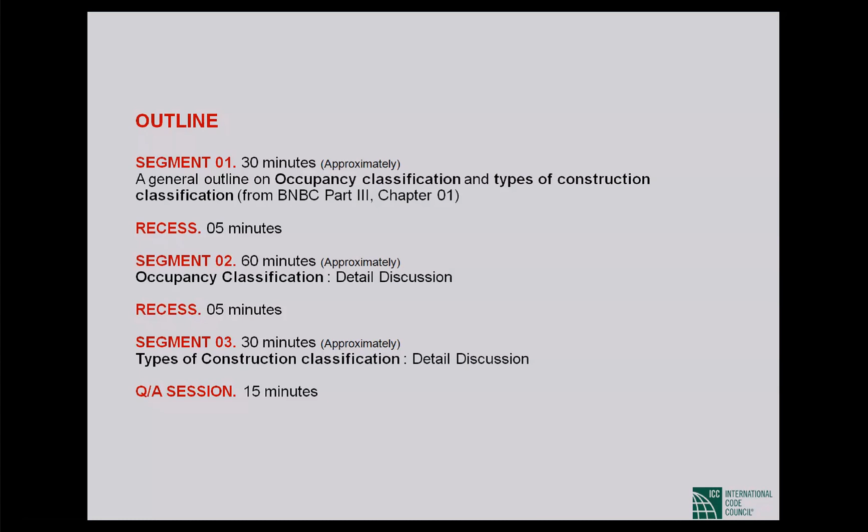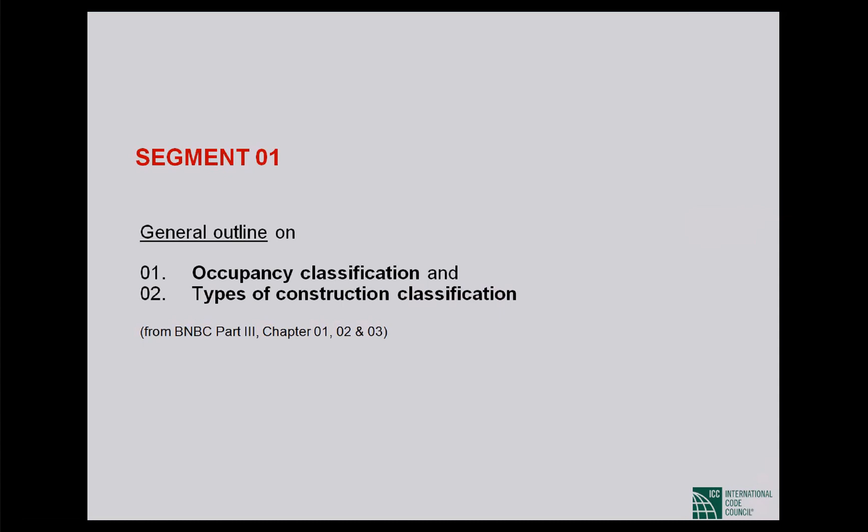So what we will cover here in this presentation today is part of chapters 1, 2, and 3 of BNBC 2020 part 3. Actually, it's part 3's 3 chapters partially covered. So let us get to the topic. We are starting segment 1 here, which is a general outline on number 1, occupancy classification, and number 2, types of construction classification.

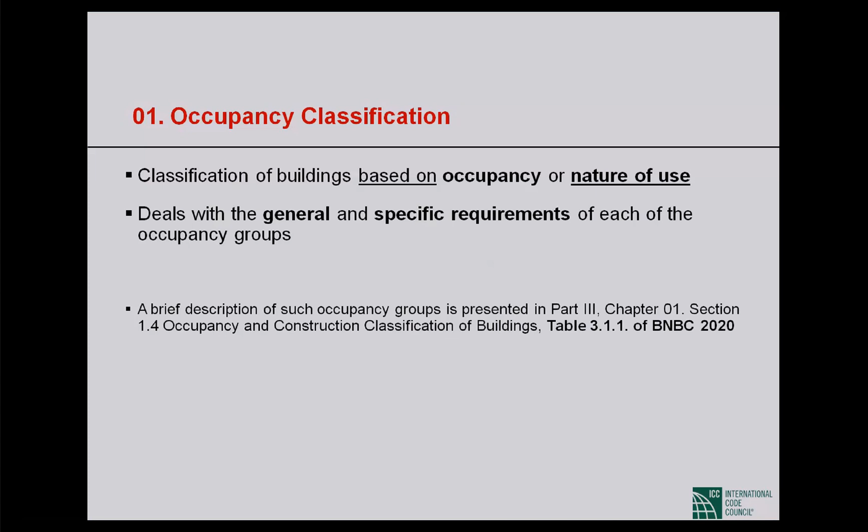So let us get an idea about occupancy classification. Occupancy classification of buildings is based on occupancy, or nature of use—how the occupants use the building is the basis of this categorization. It deals with the general and specific requirements of each of the occupancy groups, with more detailed information. It has a few chapters on it, but the initial brief description of the occupancy groups is found in BNBC Part 3, Chapter 1. Especially, it starts with section 1.4, where occupancy and construction classification of buildings is a separate section, and there is a table 3.1.1 which describes it clearly.

So, what is types of construction classification? Actually, the fire resistance ratings of various types of construction for structural and non-structural members are the basis for types of construction classification. So there are 2 classifications: one is occupancy based, and one is types of construction based. Types of construction is determined by the fire resistance rating of the structural and non-structural members.

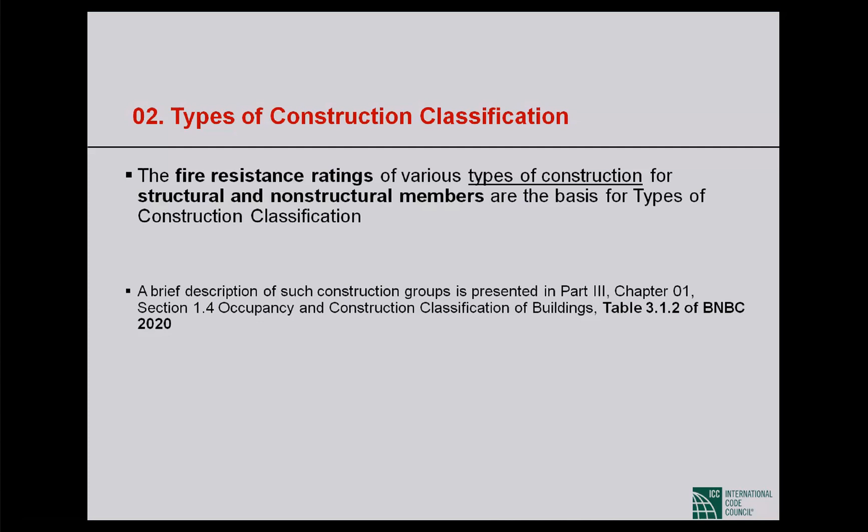The detail of fire resistance and the detail of construction classification will be found in the same chapter, same section. However, there is a different table for that, table 3.1.2.

We'll go through these tables to get an idea about occupancies and construction classifications. We start with table 3.1.1, the summary of occupancy classification. This table is divided into 4 columns: occupancy type, subdivision, nature of use of occupancy, and finally fire index with an asterisk. We'll discuss the asterisk later at the end of this chart.

In the occupancy type, each occupancy has been assigned an alphabet. The residential occupancy is assigned A, educational facilities B, and so on, continuing up to M. There are different letters for different occupancy types, and subdivisions where the letter with a number is used to represent each subtype.

In the residential category, A1 is for single family dwelling, A2 is for two family dwelling, A3 is for flats or apartments, A4 for mess, boarding house, dormitories and hostels, A5 is for hotels and lodging houses.

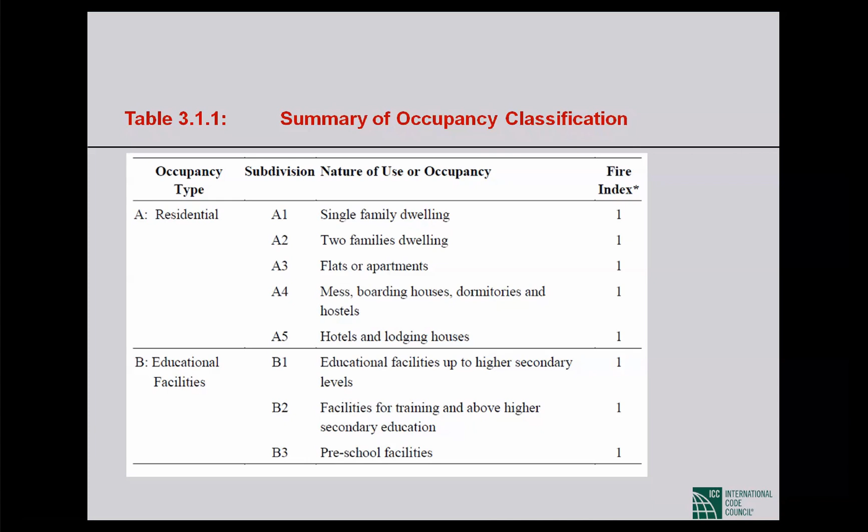The table continues. C is basically institution for care, with 5 subcategories. C1 is institution for care of children, C2 is custodial institution for physically capable adults, C3 is custodial institution for incapable adults, C4 is penal and mental institution for children, and C5 is penal and mental institution for adults. They all have a fire index of 1.

But D, E, and F have a different fire index, which is 2. D is for healthcare facilities, with two types: D1, normal medical facilities, and D2, emergency medical facilities.

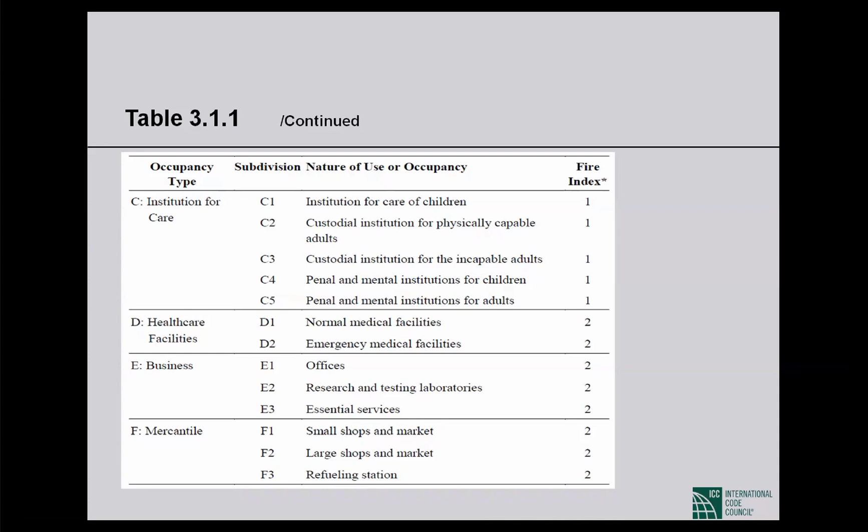E is for business. E1 is office, E2 is research and testing laboratories, E3 is essential services. F is for mercantile: F1 is small shops and markets, F2 is large shops and markets, and F3 is refueling station.

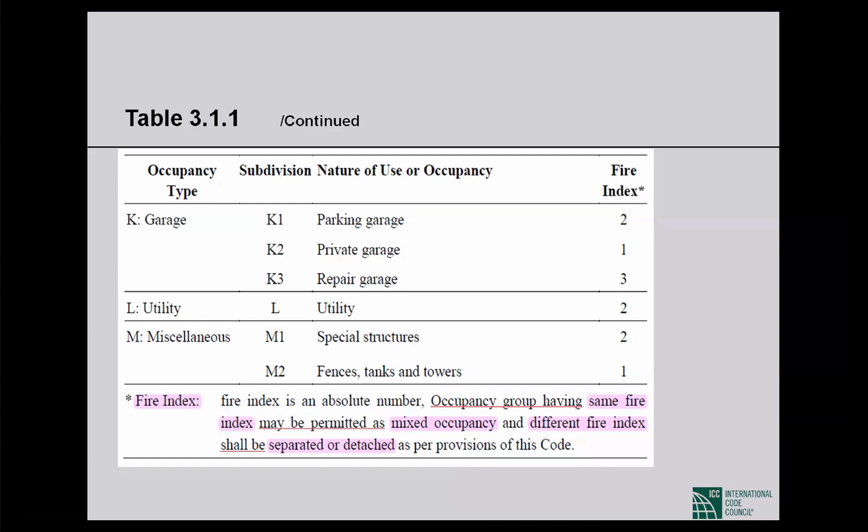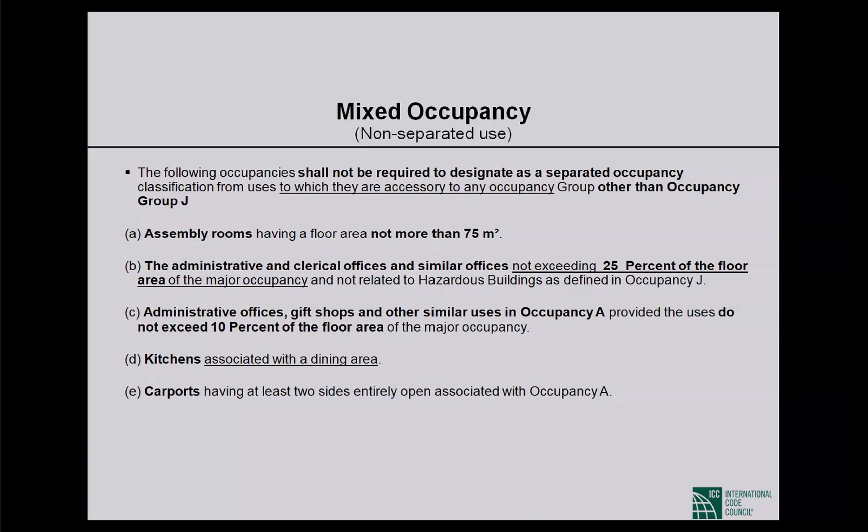So these are mixed occupancies, non-separated use, of course. So they can be considered as part of the main occupancy, and we don't need to take any special measure to accommodate them.

So here comes the separated occupancy. As you can see, separated occupancy also involves some construction measures. It's not only separated, the construction is also very important here. So, separated occupancies and construction: it says that when 2 or more occupancies are accommodated in a building, each such occupancy shall be separated according to the provisions specified in section 2.3, chapter 2, part 3, and table 3.2.1. We'll go into details of these tables and chapters and sections later on.

So we can have an idea from this statement that there are options for mixing 2 or more occupancies in the same building, but it has a condition that there will be some separation requirements, and that is mentioned in a particular section and table of this part of BNBC.

When 2 or more types of construction are used within a building, the entire building shall be subject to the most restrictive construction type and shall comply with FAR restrictions as per provision of this code. So this is about construction, not about occupancies. The second para is about type of constructions. So if we mix two or multiple types of constructions together, the most restrictive construction type shall dictate and dominate, and we have to comply with that, and the fire rating corresponding to that type of construction will be allotted to that particular development.

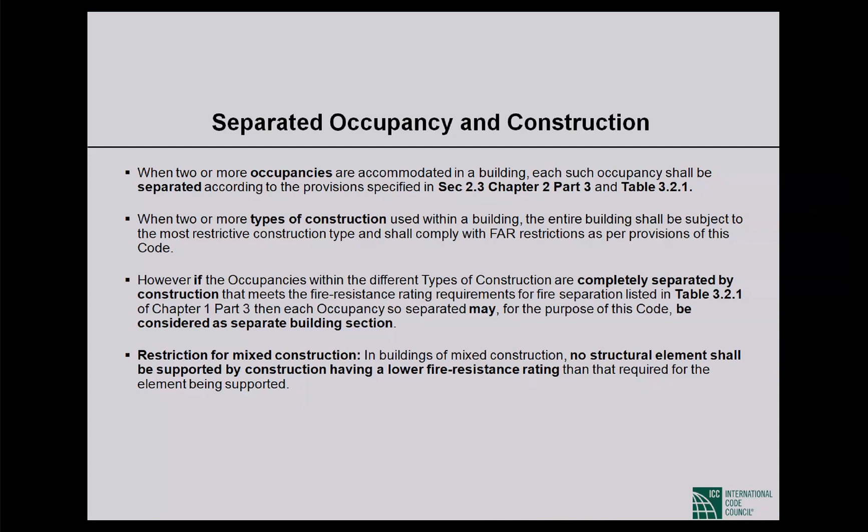Let's look at table 3.2.1, which is referred in the above slide. What is it about? It is about barrier walls and floor and ceiling assemblies and their fire resistance rating requirement, because they separate two occupancies or two types of construction from each other. So they are known as barrier walls or barrier floor and ceiling assemblies, and the fire resistance rating requirement will be according to this chart.

This chart has rows on the top side and a column on the left side, having the same occupancy numbers, A1, A2, A3 up to M1 and M2, and also A1, A2, A3 up to M1 and M2 on the other axis. In between them, there are three options: one is a number, another is NA or not applicable, and the other is NP or not permitted.

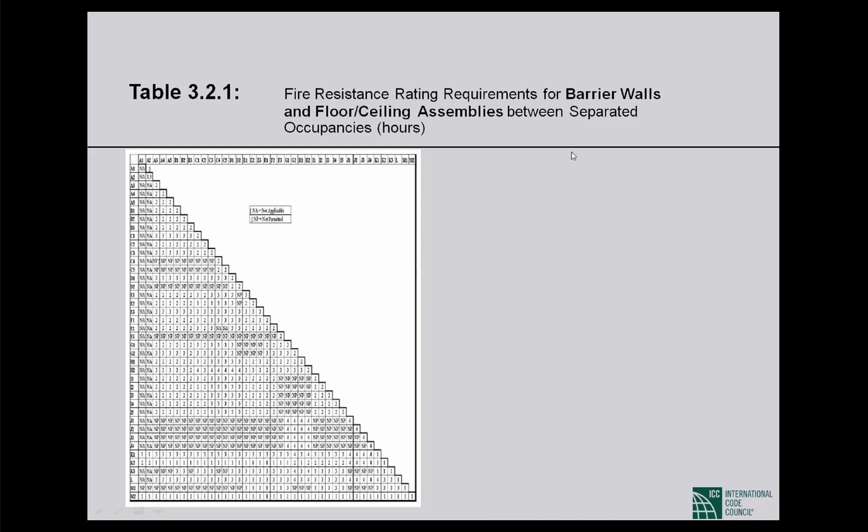So when you get an NP in a situation corresponding to other occupancies in the chart, you can understand that this particular type of construction is not permitted. But when you get a number somewhere, say 3, for example for E3 and B2, it is permitted, but you will have a 3-hour separation for barrier walls and floor and ceiling assemblies. So this is the chart that allows us to make mixed occupancies with separation. This is a separated occupancies chart.

Here is detached occupancy, the last type of occupancy mixture, where a building separated by distance in the same plot to accommodate different types of occupancies shall be termed as detached occupancy. So here we are separating by distance, not by material or fire resistance requirement of construction materials. We are just separating different building blocks through distance, and that will ensure fire safety. But it can be done within the same plot, as happens in many complexes or campuses.

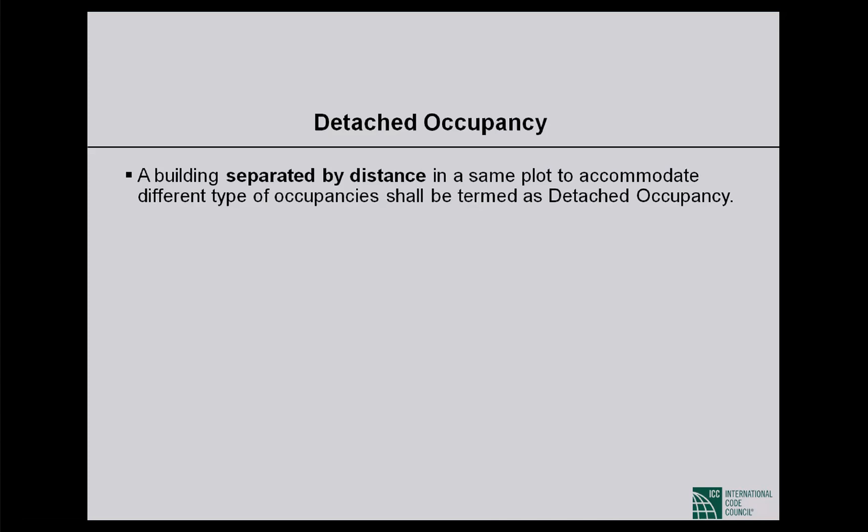So how will it be done? Actually, the separation distance is determined on the basis of two criteria: one is on the basis of difference of occupancies, and the other is on the basis of difference in height. For tall buildings, we have separate separation rules or setback rules. But for occupancies, we also have separate setback and separation rules.

So if two buildings side by side within the same plot are of different occupancies, we can make two buildings, imagine an imaginary line in between, and from that we can determine the fire separation distance. For occupancy 1, it is D1, and for occupancy 2 it is a different fire separation distance, D2. So the overall separation distance between these two occupancies is D1 plus D2, a combined distance. This is how the separation distance will be measured for detached occupancies.

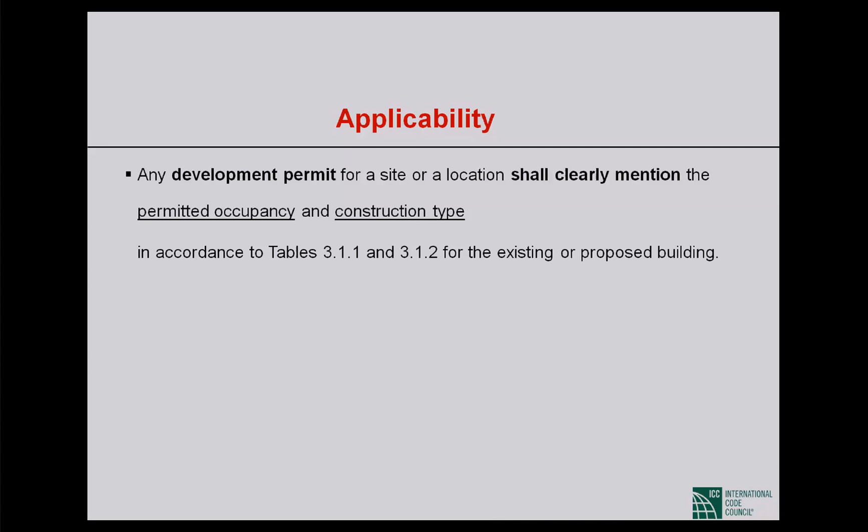So what happens to any building which is already in use, and sometimes it happens that we want to change the use. So the rule says that we need permission to do that, because without prior permission from the authorities, no change shall be made in the type of occupancy or use of any building that would place it in a different occupancy group, or in a different subdivision in the same occupancy group.

So say for example, we have a house for residential category, say A1 category, and we have decided to rent it out for some commercial purpose. We can't do that. So we cannot change type of occupancy. At the same time, even we cannot convert it into a hostel or dormitory because it will send it into a different subdivision of the same occupancy group. That is also not allowed without the prior permission of the authority.

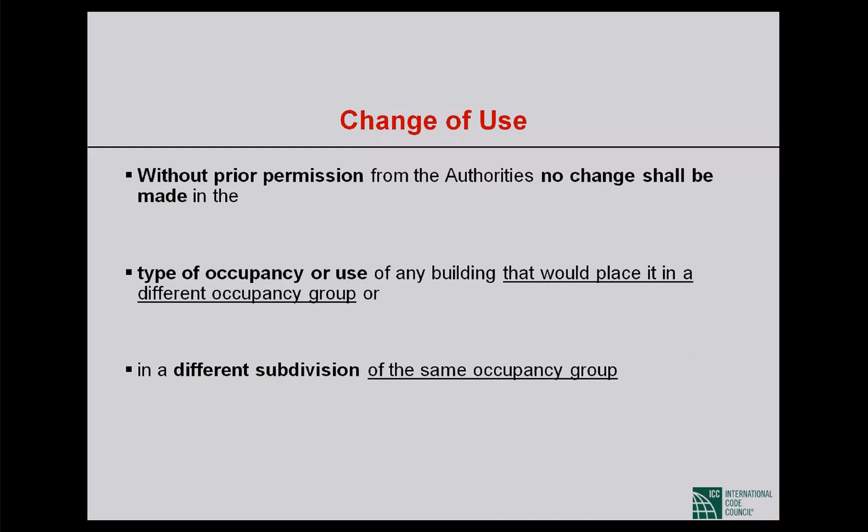We are almost at the end of this session. Just a quick go through of certain terminologies, because these terminologies will be coming again and again in our presentation, and we need to have a clear idea about these terminologies to understand this occupancy-based classification and the construction-based classification.

So there will be one is barrier. A barrier is a wall or a partition or a floor slab or a ceiling within a building which confines and protects flow of smoke and fire from the exposed side of the barrier. The fire rating of barriers shall be complied with the provisions of this code.

Then comes the control area. This is also related to the barrier. Control area is a space or a room within a building enclosed by barriers with fire rated walls, floor and ceiling, where the quantity of hazardous material shall not exceed the maximum allowable quantity per control area for storing, displaying, handling, dispensing, and using as per provisions of this code.

Then comes fire separation distance, a minimum distance which is to be maintained between potential sources and/or between structures for fire safety. In case of difference between building setback and the required minimum fire separation distance measurement, the higher value shall be implied. So I was wrong in mentioning that the fire separation distance will be determinant. Actually, it says that the higher value shall be implied, either setback or the fire separation distance, whichever is higher. So there is a correction here.

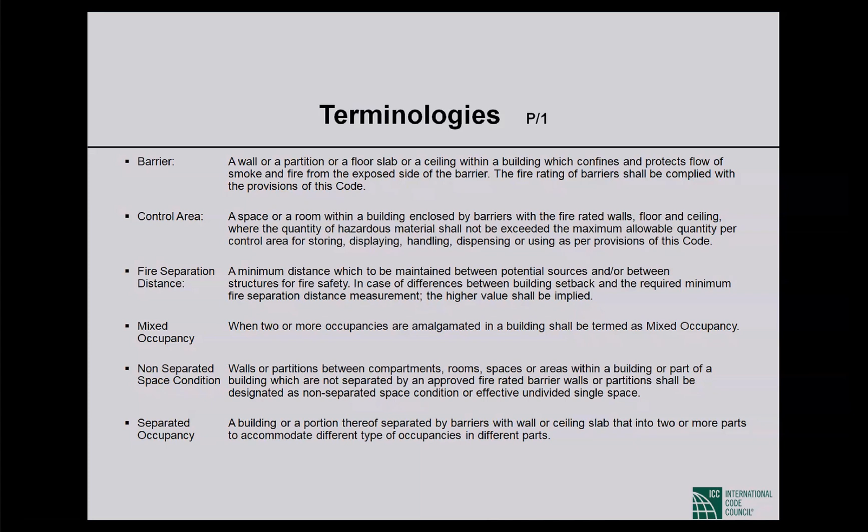Separated occupancy. A building or a portion thereof separated by barriers with wall or ceiling slab that divides it into two or more parts to accommodate different types of occupancies in different parts. Separated space condition. Rooms, spaces or areas within a building when separated by approved barrier walls.

Separation wall. This is a peripheral wall of a building, or a building which shall be divided into two or more, or a common wall between two buildings to control spreading of fire as per provision of this code. Structural frame. All members or elements such as columns, girders, beams, trusses, spandrels, which form a frame and have direct connections with bearing and transferring as an integral and essential element for the stability of a building or structure as a whole.

Unprotected. The element that shall have no prerequisites of fire protection rating. Combustible material. Any material which burns and enhances the magnitude of fire. Party wall. A fire-resistant rated wall where openings are protected, which is constructed from the ground level and continued up to at least 1 meter above the roof of a building to restrict the spread of fire.

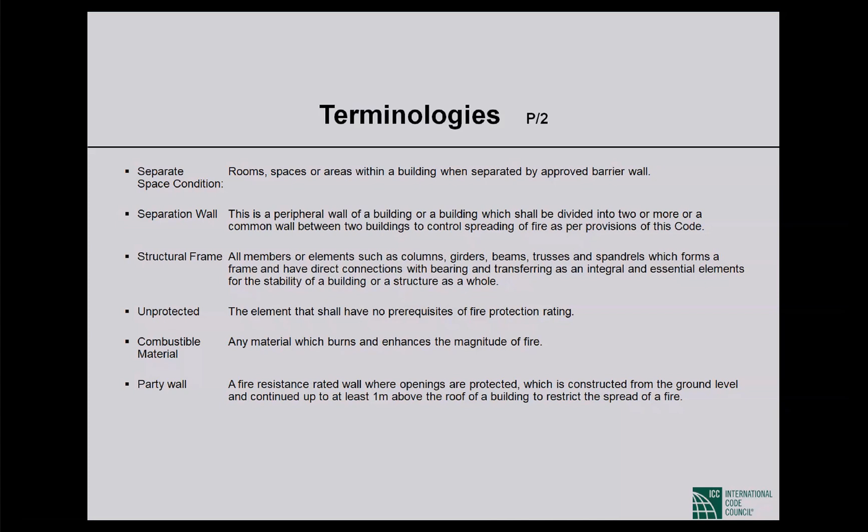So these are the relevant terminologies, and as you can see that the whole thing is focused on resisting the risk of fire and ensuring the safety of life and property. So maybe there are some repetitions, but these are the important terminologies that we need to know.

So tables and figures which are relevant to this particular presentation today. We already have covered at least 3 tables. The first 3: one is about occupancy classification, the other one is about classification of buildings and types of construction. The third one is about the fire resistance rating requirement for barrier walls and floor and ceiling assemblies. But there are other relevant tables that will be needed, and we will discuss them later, but these are the tables we need to consult.

Table 3.2.2 is about fire resisting rating of the exterior wall. Table 3.2.3 is about the fire resistance rating of the opening protection assembly. Table 3.2.4 is about the permitted type of construction and fire zones of various occupancy groups. Then there are 2 tables which deal with hazardous materials exempted amount. And finally, there is table 3.2.6, which is an A to Z list of occupancy classification.

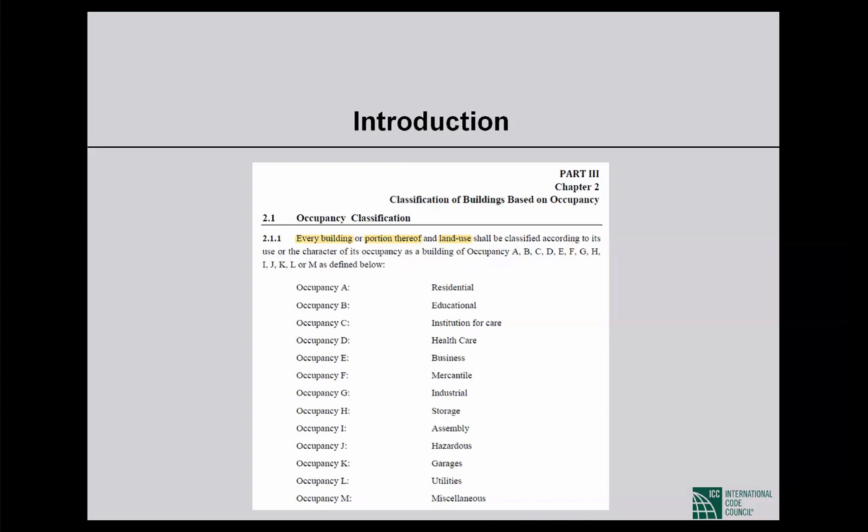as defined below. So while discussing them, we also need to know about certain more aspects which are stated in sections 2.1.2, 2.1.3 and 2.1.4 of part 3 chapter 2 of BNBC.

The first one says that utilities under occupancy L, when incidental to operation in all other types of occupancy except occupancy J, shall be considered as non-separated use of the main occupancy, but special safety measures shall be taken as per provision of this code. So L, although it is a separate individual occupancy, will mostly be considered as non-separated use, except in occupancy J. But there might be special safety measures to accommodate it as a non-separated use.

So 2.1.3 says that we have a table called the A to Z list, table 3.2.6. It states that any occupancy or use type not mentioned specifically in table 3.2.6 A to Z list, or elsewhere in the code, shall be classified by the Board of Appeals under the occupancy group to which its use most closely resembles, considering life safety and fire hazard.

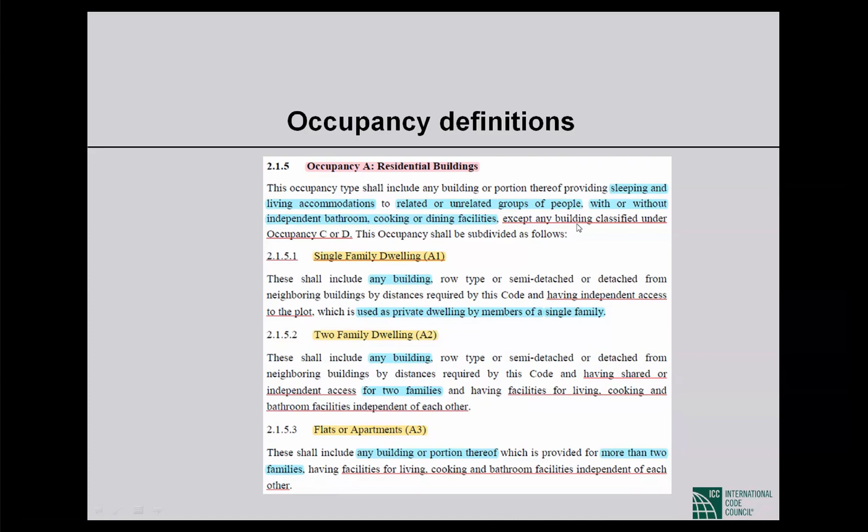Then comes A4, mess, boarding house and dormitories and hostels. This shall include any building or portion thereof in which sleeping, living accommodations and bathrooms are provided for groups of related or unrelated persons, with or without common dining facilities and with common cooking under single management control, or with individual or group cooking facilities.

A5, hotels and lodging houses. This shall include any building, a portion thereof, or group of buildings under single management in which sleeping, living accommodation and bathroom facilities are provided, with or without dining facilities, but without cooking facilities, for adult individuals, provided for hire on transient or permanent basis.

So that concludes the A group, that residential group. We start with the educational facilities, occupancy B. This occupancy type shall include any building or portion thereof in which education, training and care are provided to children or adults.

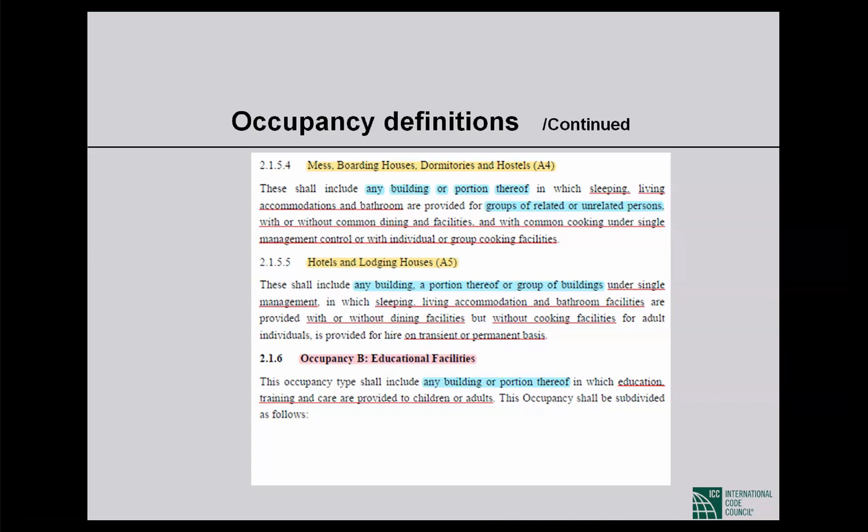This occupancy shall be subdivided as follows. B1, educational facilities up to higher secondary level. This shall include any building or portion thereof used for purpose involving assembly for instructions, education and recreation for more than 6 persons on regular basis to fulfill the requirement of an academic curriculum approved by the government up to higher secondary level, and which is not covered by occupancy I.

Then B2, facilities for training and for above secondary level. This shall include any building or portion thereof used for purpose involving assembly for instruction, education, training and recreation for more than 6 persons, and which is not covered by the occupancy I and B1.

B3 is for preschool facilities. This shall include any building or portion thereof used for purpose involving care, recreation and education for children more than 6 in number who have not yet reached the age to attend the school.

Then comes the institution for care, occupancy C. Buildings classified under this occupancy shall include those used for purpose of institutional care of the occupants, such as detention for correctional or penal purposes, medical or nursing care for persons suffering from illness or infirmity due to mental condition, or accommodation of children or minor where the personal liberty of the inmate is restricted. These buildings shall ordinarily provide accommodation for sleeping, dining, and other provisions approved by the authority for the occupants.

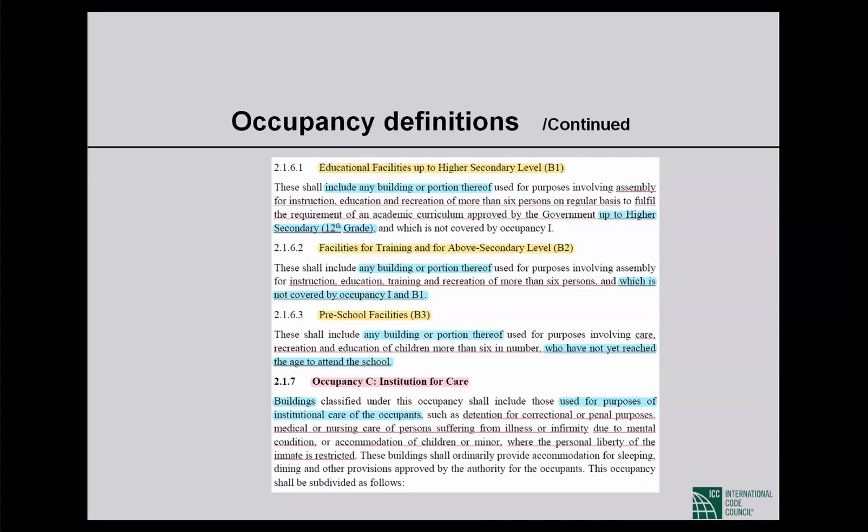This occupancy shall be subdivided as follows. Institution for care of children, C1. This shall include any building or portion thereof or group of buildings under single management used as an institution for the full-time care of children or minor, each providing accommodation for sleeping, dining, and other provisions approved by the authority for more than 6 children.

C2 is custodial institution for physically capable adults. This shall include any building or portion thereof or group of buildings under single management used for purpose of full-time care and custody of adult or mentally disabled persons, but physically capable of responding to emergency.

Now, I would like to add a few words to this situation, because we can see that all the classifications or occupancies have their descriptions, but the underlying tone is about whether the occupants can respond to emergency, especially in institutional category C1, C2, C3, C4. You can see that there are people who are infirm, who cannot move without assistance. There are children who are in custody of other adult members of society. So in case of an emergency, they probably don't know how to respond. So these are all custodial institutions or care institutions where the occupancy is decided in a manner based on whether the people will be independently able to respond to an emergency or not.

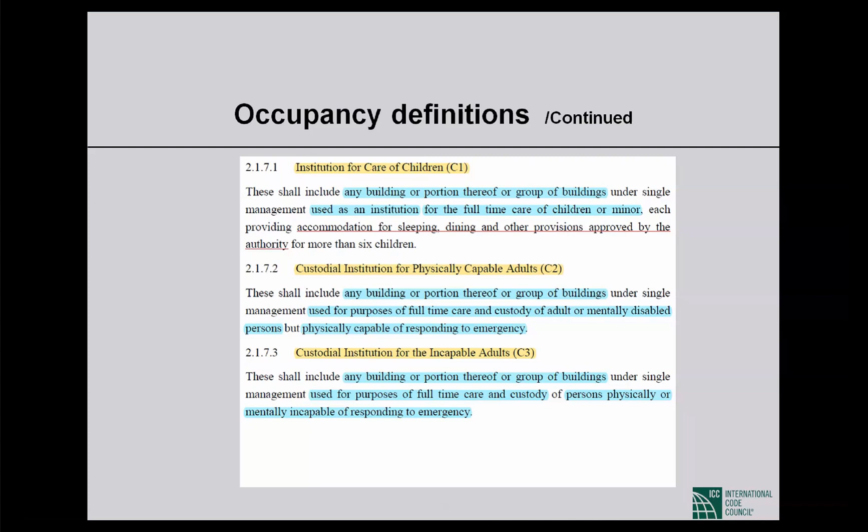So let's go to the third segment of it, C3, custodial institution for incapable adults. This shall include any building or portion thereof or group of buildings under single management used for purpose of full-time care and custody of persons physically or mentally incapable of responding to emergency.

C4 is penal and mental institution for children. This shall include any building or portion thereof or group of buildings under single management used for housing children under restraint or who are detained for penal and corrective purposes, in which personal liberty of the inmate is restricted.

C5 is penal and mental institution for adults. This shall include any buildings or portion thereof or group of buildings under single management used for housing persons under restraint or who are detained for penal and corrective purposes, in which personal liberty of the inmate is restricted.

Now comes occupancy D, healthcare facilities. Buildings under this occupancy group shall include those used for purposes of providing medical care, diagnostic facilities, and treatment to persons suffering from physical discomfort, in which sleeping accommodation may or may not be provided. This occupancy shall be subdivided as follows.

D1 is normal medical facilities. This shall include buildings or portion thereof or group of buildings under single management in which essential medical facilities having surgery, emergency and casualty treatment facilities, general or specialized medical and other treatment are provided to persons suffering from physical discomfort. These are all general medical facilities.

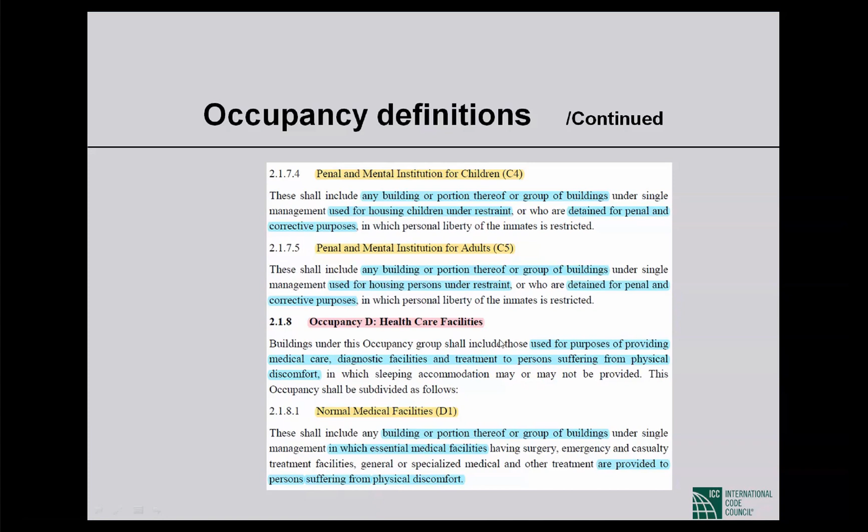The D2 category, emergency medical facilities, describes that this shall include any building or portion thereof used for purposes of providing essential medical services, having surgery, emergency, casualty treatment facilities, general or specialized medical or other treatment is provided to persons suffering from physical discomfort. Up to this point, it resembles D1, but there are some exceptions that make it a different subcategory.

This type shall be equipped and designed to handle post-disaster emergency. By construction, it is required to remain operational during and after disaster, built as a part of disaster preparedness program. So D2 is a special facility which needs to be operational in a post-disaster situation, or it will be part of a disaster preparedness program.

So occupancy E is for business. This shall include any building or portion thereof which is used for business transaction other than mercantile. This occupancy shall be subdivided as follows. Office E1: this shall include any building or part thereof which is used for paperwork, documentation, only display of samples of products but not for direct sale, maintaining accounts and records for administrative or consulting services, banking, or activities for business purposes, and professional training.

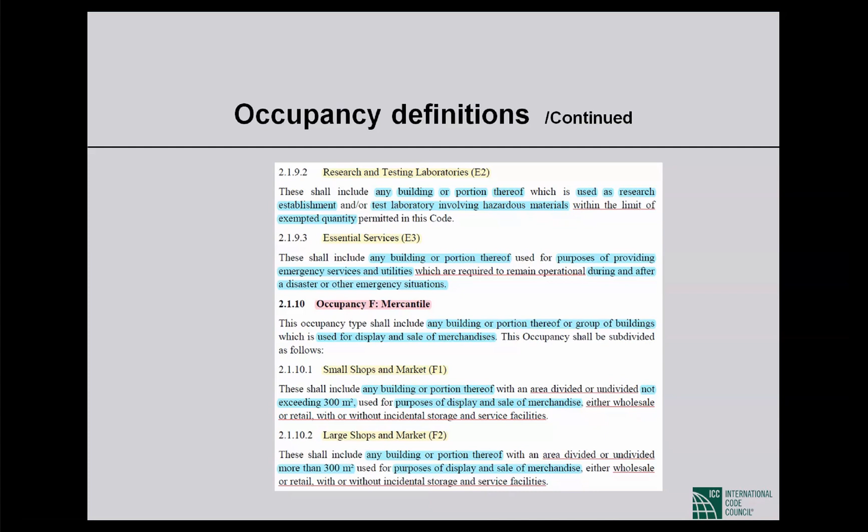Large shops and markets, F2 category. This shall include any building or portion thereof with an area divided or undivided more than 300 square meter, used for purpose of display and sale of merchandise, either wholesale or retail, with or without incidental storage and service facilities.

The third one is refueling station, F3. This shall include any building or portion thereof used for providing refueling and maintenance without repair services for automobiles, which is moderately hazardous in nature.

So we are getting into difficult occupancies, not in a sense that it is something different from other occupancies, but in a sense that which requires much more protection and care in terms of fire safety and other safeties. So here we start with occupancy G, industrial building.

Buildings under this occupancy shall be subdivided on the basis of hazard potential of the contents and the process of the industry. So it is the hazard potential of the contents of an industry, or the process of an industry, that determines this category or subcategory.

The hazard shall generally mean the relative danger of the start of fire and the rapidity of its spread, the danger of smoke and gases generated that pose a potential threat to the safety of the occupants of the building. Unless areas with different degree of hazard are effectively segregated and separated in accordance with the provisions of this code, the most hazardous area in a building shall govern its classification.

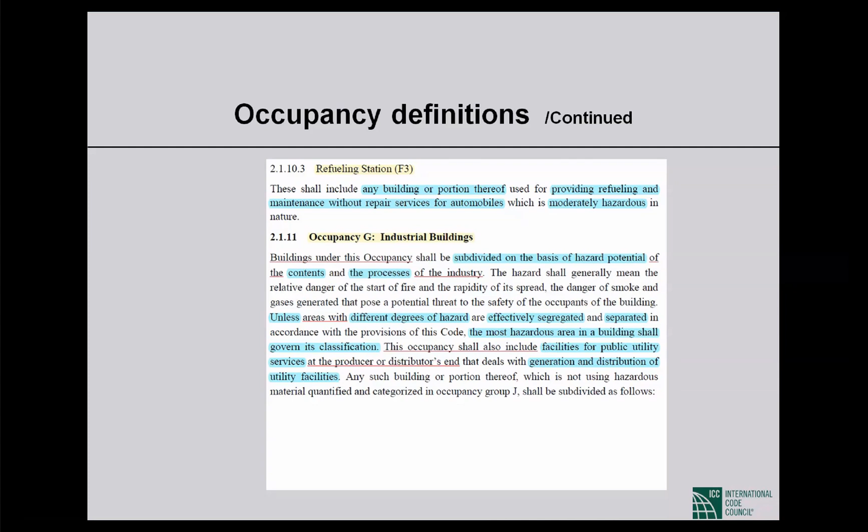This occupancy shall also include facilities for public utility services at the producer or distributor's end, and deals with generation and distribution of utility facilities. Any such building or portion thereof which is not using hazardous material quantified and categorized in occupancy group J shall be subdivided as follows.

Low hazard industry G1 shall include any industrial building in which contents are of such low combustibility and the process conducted therein are of such low hazardous nature that danger of self-ignition and self-propagation of fire is non-existent. The only danger being an onset of fire from external sources with resulting danger to life and property. So it is a relatively safer low hazard industry.

G2 is about moderate hazard industry. This shall include any industrial building in which contents are moderately combustible and the industrial process conducted therein are liable to give rise to a fire which will spread with moderate rapidity, giving off considerable smoke. So it has moderate hazard.

Then comes occupancy group H, storage buildings. Buildings under this occupancy group shall include any building or portion thereof used primarily for storage or sheltering of goods, wares, merchandises, vehicles or animals. Any such building or portion thereof which is not used for storing hazardous material quantified and categorized in occupancy group J shall be subdivided as follows.

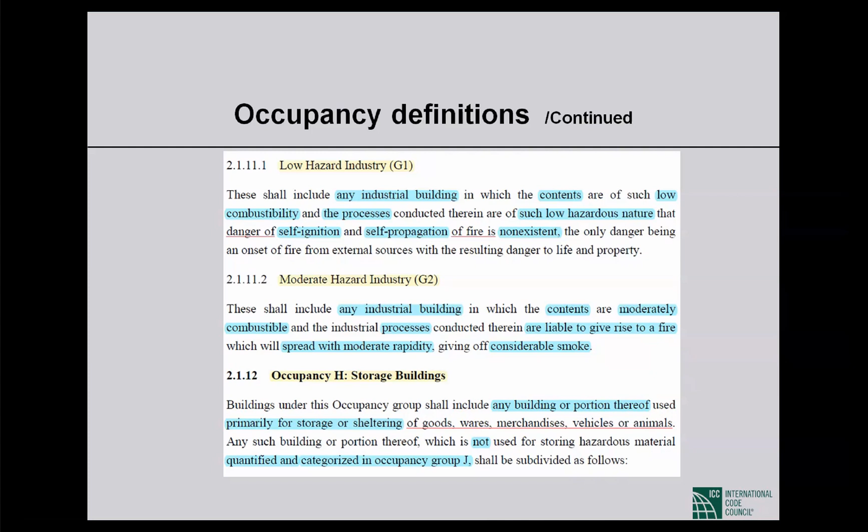So occupancy group H comes into two categories. One is low fire risk storage, category H1. The other is moderate fire risk storage, category H2.

H1 is the category where this shall include any building or portion thereof which is used for storage of materials or other contents which do not constitute the danger of self-ignition. And in the event of fire, the rate of burning shall be less than moderate rapidity.

So we will have more details in the fire segment, fire chapter part 4, about what is low fire rapidity or moderate fire rapidity or high fire rapidity. That will be discussed in later presentations. But for the time being...

The low fire risk storage occupancy says that it has contents or storages of materials that have less than moderate rapidity of fire. So low fire risk means less than moderate rapidity of fire. So it is not moderate, it is less than moderate rapidity.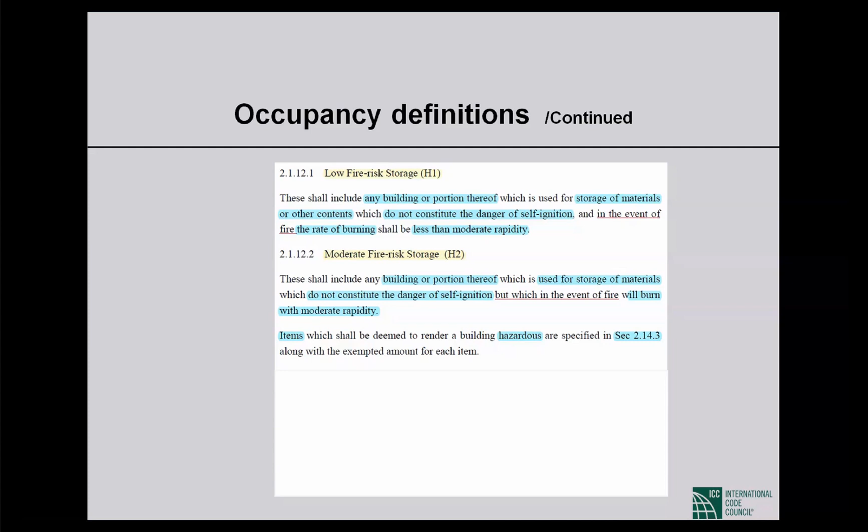Items which shall be deemed to render a building hazardous are specified in section 2.14.3 along with exempted amount for each item. So we have new references about section 2.14.3 and the new terminology that an exempted item is there.

There are two tables containing a list of exempted items, table 3.2.5a and 3.2.5b, which deal with exempted amount of hazardous material. The basic idea of this table is about stating a limit of storage. As you can see in the fourth column, there is a storage limit. The storage can be of two types.

It can be a closed system storage or it can be an open system storage. If it remains open, the storage safety margin is compromised, and so the storage quantity is reduced considerably. But if you can compartmentalize it and use a closed system, you can increase the storage limit. So that is the basic idea of this chart or table.

There are different types of materials which are flammable, combustible, combination of flammable gases, liquid, flammable, combustible fibers, and there are many others. So for each, there is a class or state describing it into its class. Actually, it is more about its fire spread capacity, and that determines the storage limit.

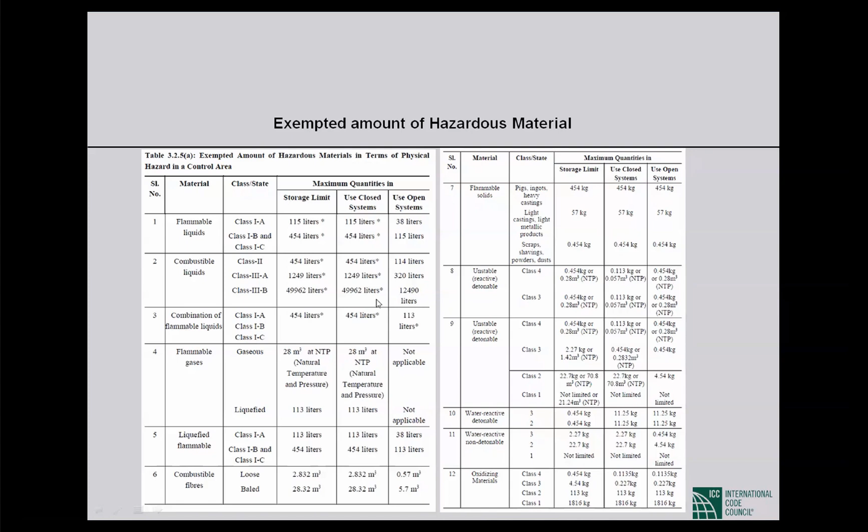So if we can use control area for the storage of these elements according to this chart, we can create a safer environment for hazardous materials. This is the continuation of the same chart.

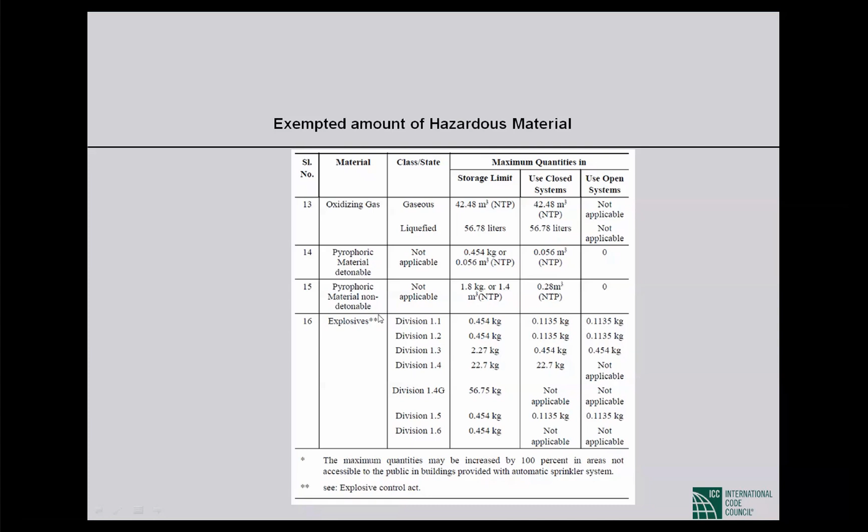There are oxidizing gases, pyrophoric material, detonable, and explosive materials. So the chart covers all sorts of hazardous materials. There are some other types of hazardous materials that can pose a threat to your health hazard. So here, the same thing applies. They can be corrosive, highly toxic, or toxic.

So in a single storage situation, a closed system can accommodate up to this quantity safely. The open system can be different here. So that determines the basic guidelines of occupancy H, the hazardous occupancy.

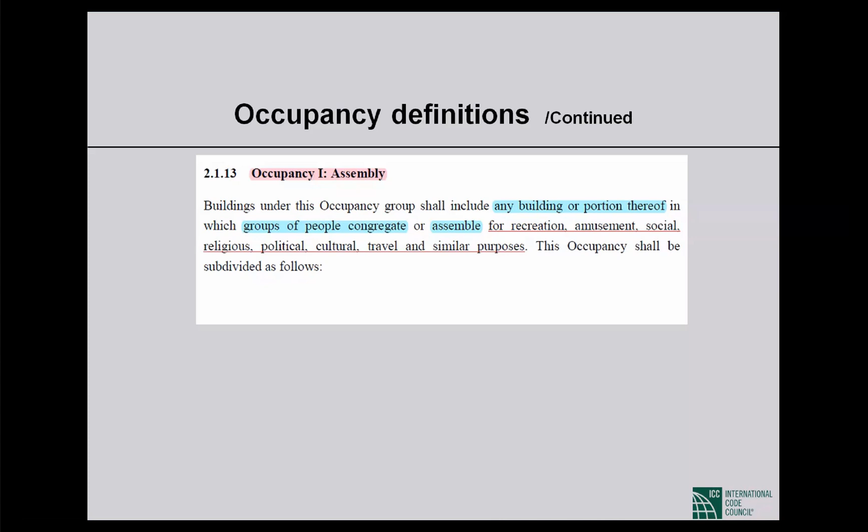So we will go for assembly occupancy I. Building under this occupancy group shall include any building or portion thereof in which groups of people congregate or assemble for recreation, amusement, social, religious, political, cultural, travel, and similar purposes. This occupancy shall be subdivided as follows.

Large assembly with fixed seats, I1. This occupancy shall include a building or a portion thereof for assembly in a space provided with fixed seats for 1,000 or more persons. Assembly buildings under this subdivision may be for theatrical, operatic performance, or cinema projection, having or not a raised stage, proscenium curtain, scenery loft, or projection screen, lighting equipment, projection booth, and necessary theatrical and mechanical equipment.

Small assembly with fixed seats, I2. This occupancy type shall include any building or portion thereof primarily meant for use as described for building under occupancy I1, but with fixed seats for less than 1,000 persons in a space. These assembly buildings may or may not be provided with a legitimate technical stage, theatrical stage, or related accessories or equipment.

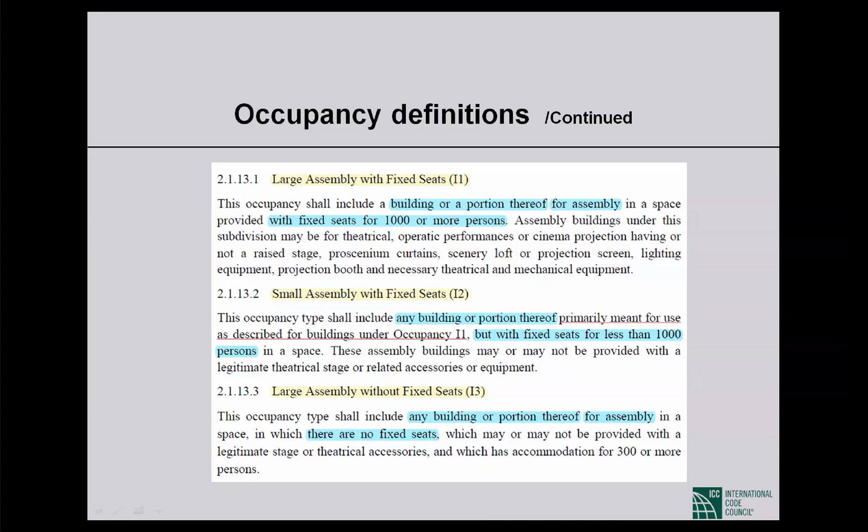I3, large assembly without fixed seats. This occupancy type shall include any building or portion thereof for assembly in a space in which there are no fixed seats, which may or may not be provided with a legitimate stage or theatrical accessories, and which has accommodation for 300 or more persons.

I4, small assembly without fixed seats. This occupancy shall include any building or portion thereof primarily intended for use as described in occupancy I3, but with accommodation for less than 300 persons in a space.

I5, sports facilities. This occupancy type shall include any building or portion thereof meant for assembly of spectators for recreational and amusement purpose, mainly related to sports.

So we start the new category, occupancy J, hazardous building. Any building or portion thereof used as storage, industrial, research, and other facilities dealing with hazardous material in excess of exempted quantity defined in table 3.2.5, or any microbiological facilities, shall be categorized in this occupancy group.

So the same industry or storage building or research and other facilities can be categorized in a different category if they deal with the hazardous material within the exempted quantity. But if they have excess of exempted quantity with them, then they will be considered as hazardous buildings.

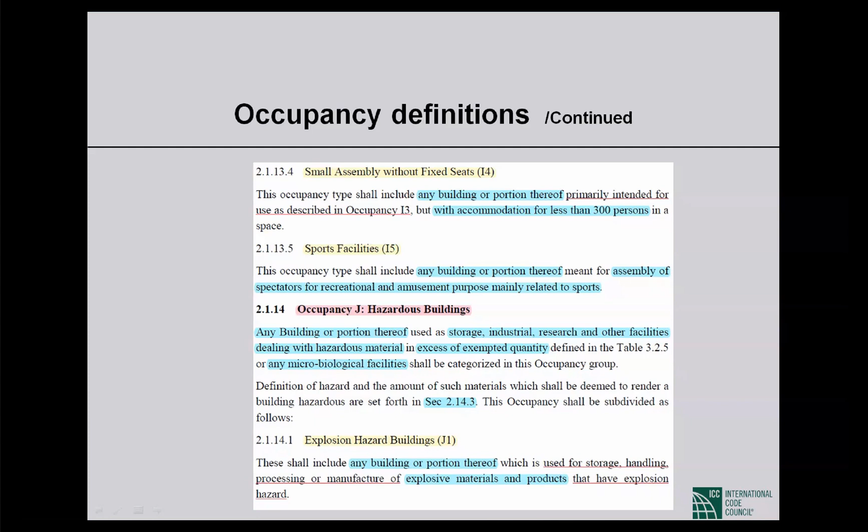Explosion hazard building, J1. This shall include any building or portion thereof which is used for storage, handling, processing, or manufacturing of explosive materials and products that have explosion hazard.

Chemical hazard building, J2. This shall include any building or portion thereof which is used for storage, handling, processing, or manufacture of materials and products that are highly corrosive, toxic, poisonous, and physically harmful, including corrosive and toxic alkalis, acid, and other liquids or chemicals producing flame, fumes, radiation, and explosive, poisonous, irritant, or corrosive gases.

Biological hazard building, J3. This shall include any building or portion thereof which is used for storage, handling, processing, and manufacturing of materials and products that use biological processes and in which the risk of harmful biological threat to the occupants exist. J4, radiation hazard building.

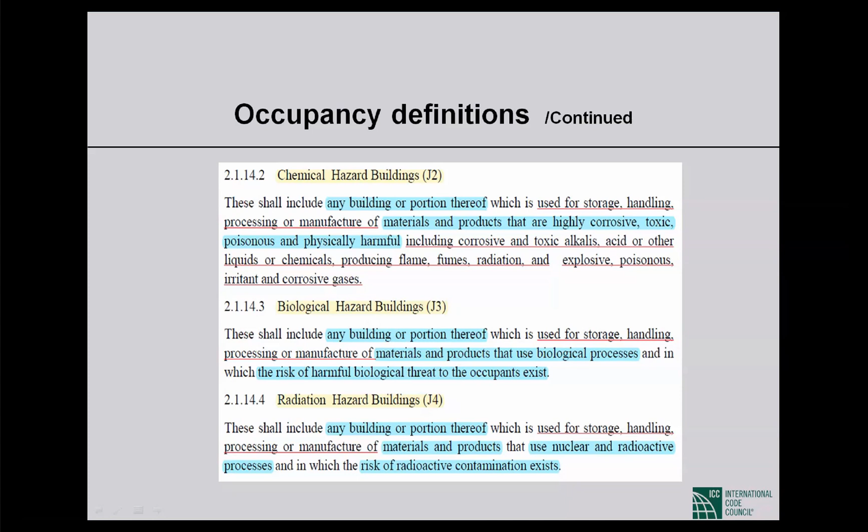This shall include any building or portion thereof which is used for storage, handling, processing, or manufacture of materials and products that use nuclear and radioactive processes and in which the risk of radioactive contamination exists.

Occupancy K, garage. These occupancy types shall include any building or portion thereof used where one or more vehicles having containers of flammable liquid or compressed gas or carrying power, or combination of any of these as a supply source of self-propelling, are kept for use, sale, rental purpose, storage, repair, exhibition, and all those floors of a building or portion thereof in which such vehicles are not separated by suitable cutoffs to prevent fire spreading.

Parking garage, K1. This occupancy type shall include any building or portion thereof used solely for parking motor vehicles for a limited period of time.

Private garage, K2. This occupancy type shall include any building or portion thereof used as store for owners' or tenants' motor vehicles for private use for unlimited period of time.

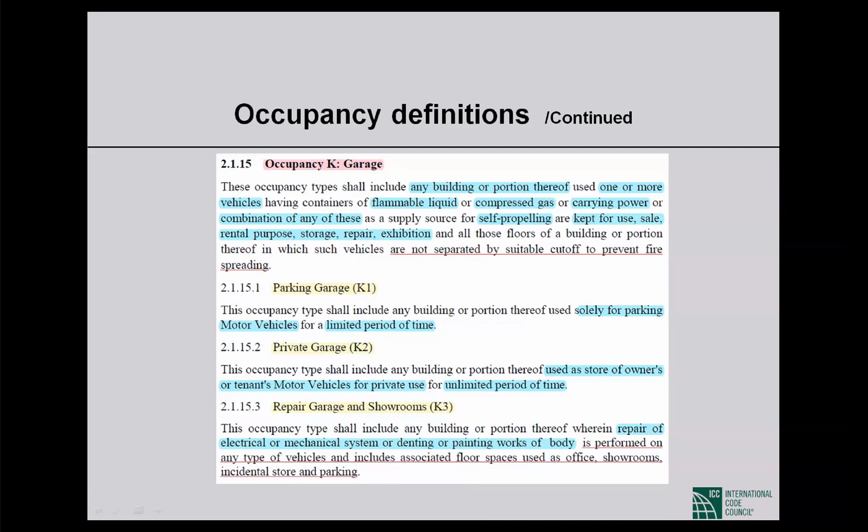Repair garage and showrooms. This occupancy type shall include any building or portion thereof wherein repair of electrical or mechanical system or denting or painting works of body is performed on any type of vehicles, and include associated floor spaces used as office, showrooms, incidental store, and car parking.

Occupancy L, utility. This occupancy type shall include any building or portion thereof used to install any type of equipment to provide support services to any building or portion thereof or group of buildings of all occupancy groups, and with special provisions for occupancy group J.

This shall also include all public and private utility facilities of the consumer's end that are located within the consumer's site, and all installations are required special care to ensure life and property safety as per provisions of this code.

Occupancy definition for miscellaneous. This is the last category we have. Buildings under this occupancy shall include special buildings not covered in other occupancy groups. These occupancies shall be as follows.

Special structure M1: any building or structure which is neither listed in the A to Z list nor covered in any occupancy group provided in this code, but unique in character, may be categorized in this group by the Board of Appeals. Each and every individual M1 structure shall comply with NFPA or equivalent standard for life and fire safety.

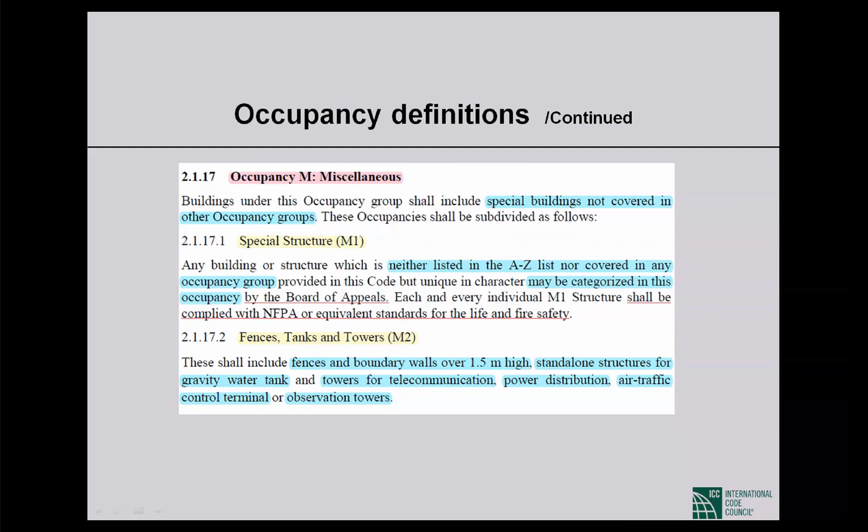So this is the main description of the occupancy classification for each occupancy, and at the end of this session we will visit a list of occupancy classifications. It is table 3.2.6, located at chapter 2 of part 3. At the end of this chapter we can get table 3.2.6. Let's have a look at that table.

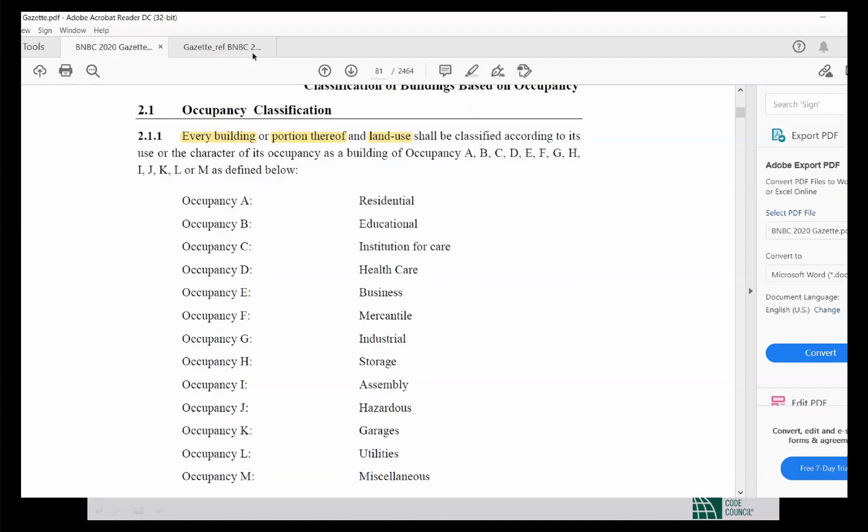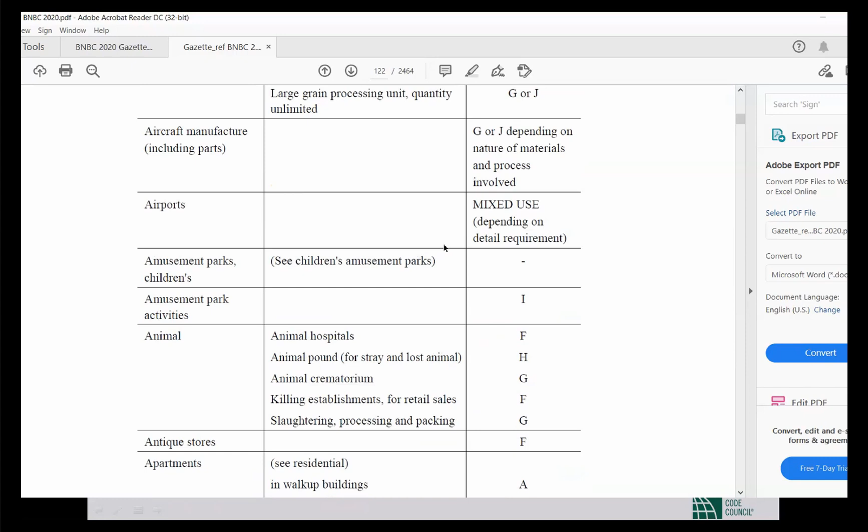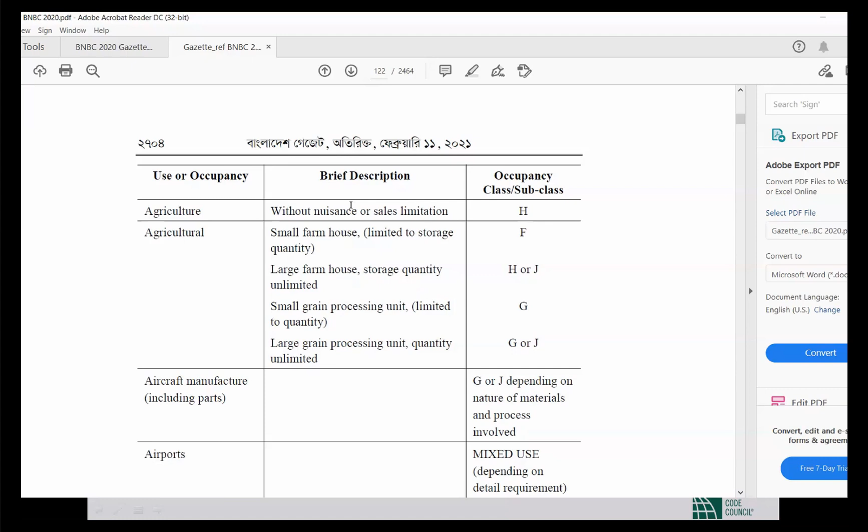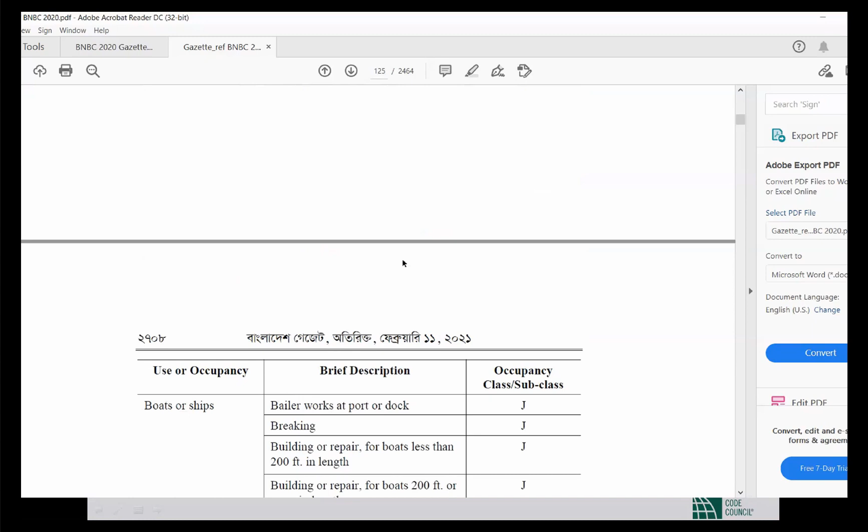So here is table 3.2.6, the A to Z list. As you can see if you go through it, there are alphabetical orders of different uses. At the right end is the occupancy class or subclass, and there is a brief description in between. So it is a large content where many occupancies are covered. Our day-to-day uses are mostly covered here, but there might be some occupancies which are left out.

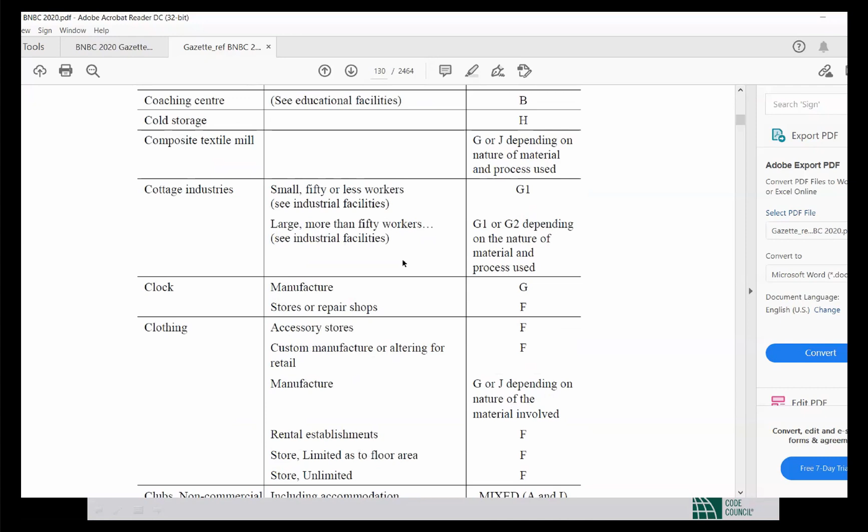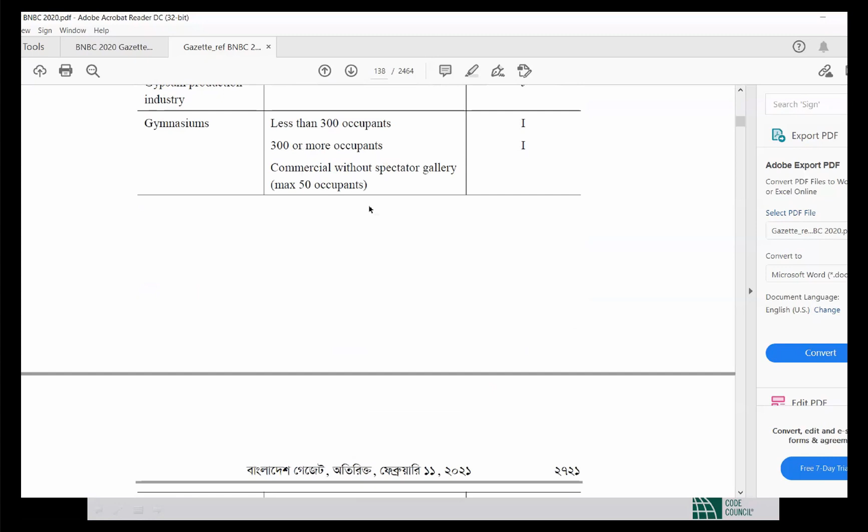So they have clear indication in the main occupancy group, and if not, then it must be referred to the Board of Appeals, and they can tell us what occupancy they should be. So this is quite a long list containing many occupancy classifications and their categories or subcategories.

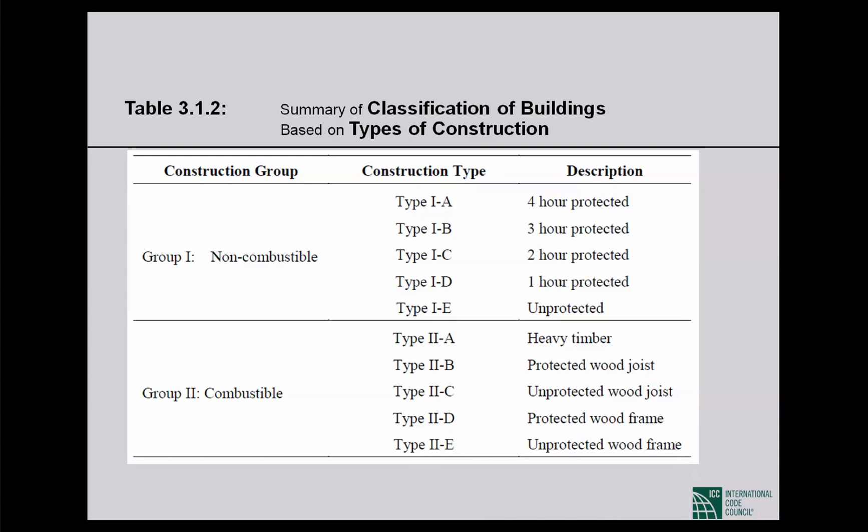So this is the classification of building on the basis of types of construction. We have already gone through it. We know that there are combustible and non-combustible types, and each has 5 sub-construction types. The code states that no building or portion thereof shall be designated a given construction type unless it fully conforms to the minimum requirement for that construction type.

So this term 'fully conforms' is very important. It cannot conform partially. So any building must have the same construction type to conform it to the code all along.

So when a type of construction is utilized which is superior to the type of construction required by this code—say for example, if the code asks for a type 2A construction, and maybe there is a previous development which already has a type 2A construction, but the new construction is intended to be done in type 1A construction—

in this case, when a type of construction is utilized which is superior than the type required by this code, there shall be no requirement to upgrade the rest of the construction to comply with that higher type. The designated construction type shall be that of a lesser classification unless all of the requirements of the higher classification are met.

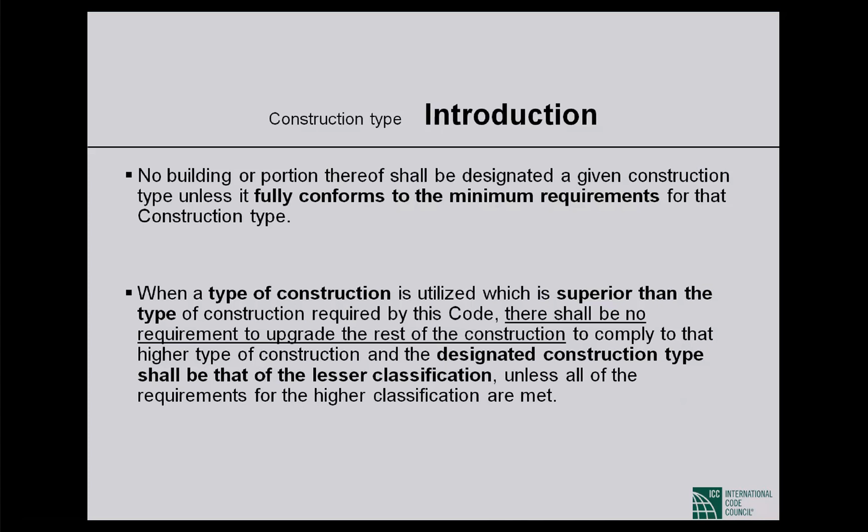So although we are using a higher classification construction here partly, it will be credited to the lower classification construction because of the presence of that segment in the construction. But it covers the requirement because the code requires maybe a type 2 construction, so that's fine with the authority—they can approve it. They can always approve the higher type of construction, but cannot accredit for that unless the whole structure is converted into a higher type construction.

The fire resistance ratings of various types of construction for structural and non-structural members are specified in table 3.3.1a and b—we'll go through these tables. For hazardous occupancies involving an exceptionally high degree of fire risk or an exceptionally high concentration of combustible or flammable content, the authority may increase the requirements of table 3.3.1a. Buildings having a height of more than 33 meters shall be constructed with non-combustible materials. The fire resistance ratings of various building components shall conform to ASTM standards. So these are basic introductory information on this construction classification.

Now we are coming to the definitions. What is non-combustible construction? Buildings or portions thereof in non-combustible construction group 1 are those in which walls, exitways, shafts, structural members, floors and roofs are constructed of non-combustible material and assemblies having fire resistance ratings specified in table 3.3.1a. The non-combustible group consists of construction types 1A, 1B, 1C, 1D and 1E.

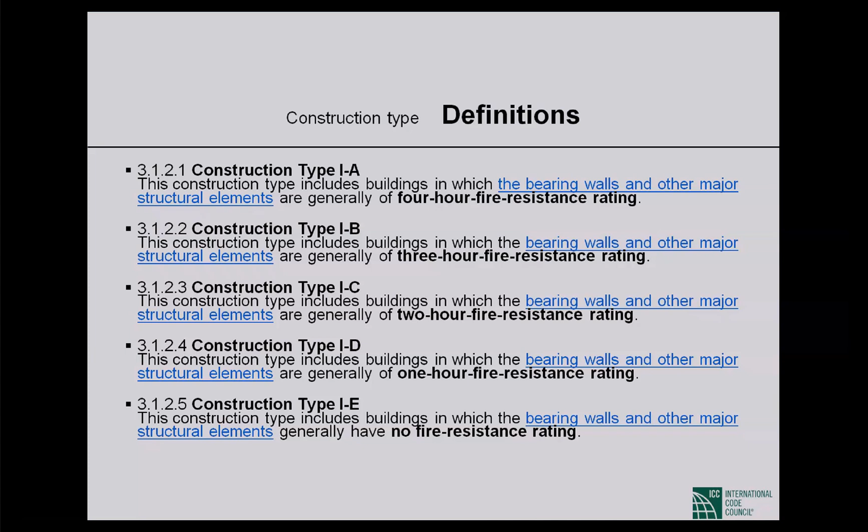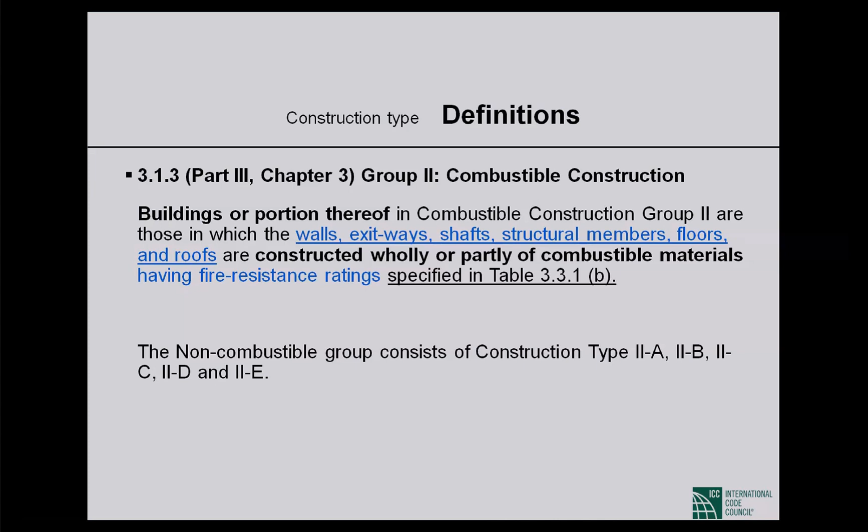For group 2, combustible construction, buildings or portions thereof are those in which walls, exitways, shafts, structural members, floors and roofs are constructed wholly or partly of combustible materials, having fire resistance ratings specified in table 3.3.1b. The combustible group consists of construction types 2A, 2B, 2C, 2D and 2E.

Construction type 2A includes heavy timber construction in which fire resistance is attained by, A, limiting the minimum size of wood structural members and the minimum thickness and composition of wood floors and roofs. So the size of wooden members used in the structure, floor and roof is important here, and there are specified dimensions for them to ensure safety.

B is avoiding concealed spaces under floors and roofs, or by providing fire stopping protection for these spaces. That is another measure for further fire safety protection.

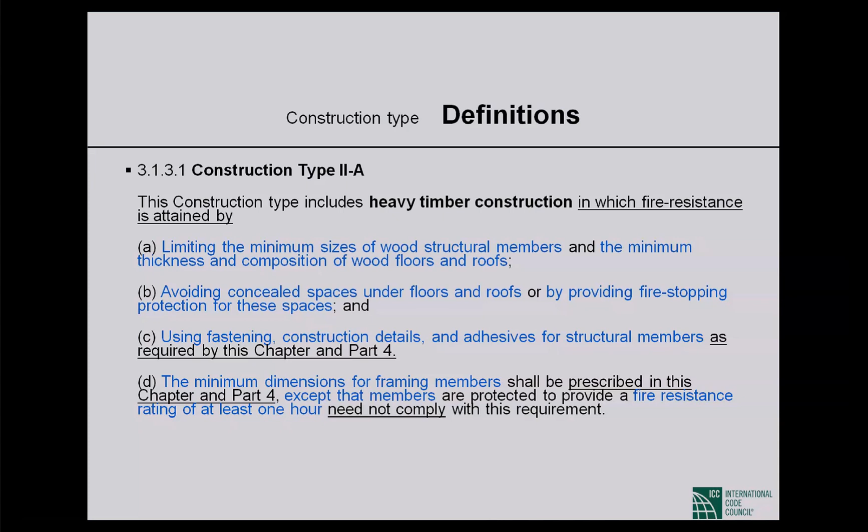C is using fastening, construction details and adhesive for structural members as required by this chapter and part 4. D is the minimum dimension for framing members shall be prescribed in this chapter and part 4, except that members protected to provide a fire resistance rating of at least 1 hour need not comply with this requirement. So this is construction type 2A.

For construction type 2B, this includes buildings and portions thereof in which exterior walls, firewalls, exitways, and shaft enclosures are of non-combustible materials having the required fire resistance ratings. The floors, roofs, and interior framing are wholly or partly of wood of smaller dimensions than required for type 2A construction, and are of other combustible or non-combustible materials having the required fire resistance rating.

Construction type 2C includes buildings and portions thereof in which exterior walls, firewalls, exitways, and shaft enclosures are of non-combustible material having the required fire resistance rating. B, the floors, roofs, and interior framing are wholly or partly of wood of smaller dimension than required for type 2A construction, or are of other combustible or non-combustible materials having no required fire resistance rating.

As you can see from these three construction types, two features are most important: how the walls are constructed, and how the floors and roofs are constructed, and whether they can be partially protected or not. That determines the classification type.

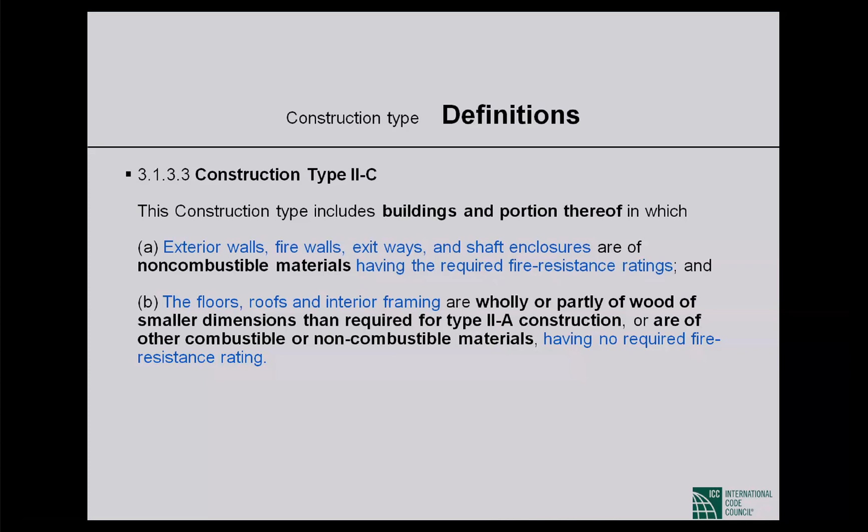Construction type 2D includes buildings and portions thereof in which exterior walls, bearing walls, floors, roofs, and interior framings are generally of wood or other combustible materials, having the required fire resistance ratings. So these are four construction types. The final one is type 2E.

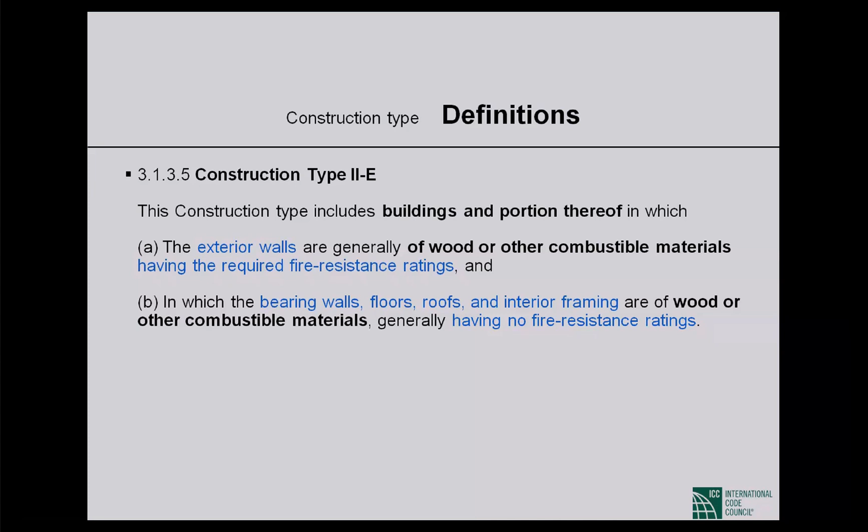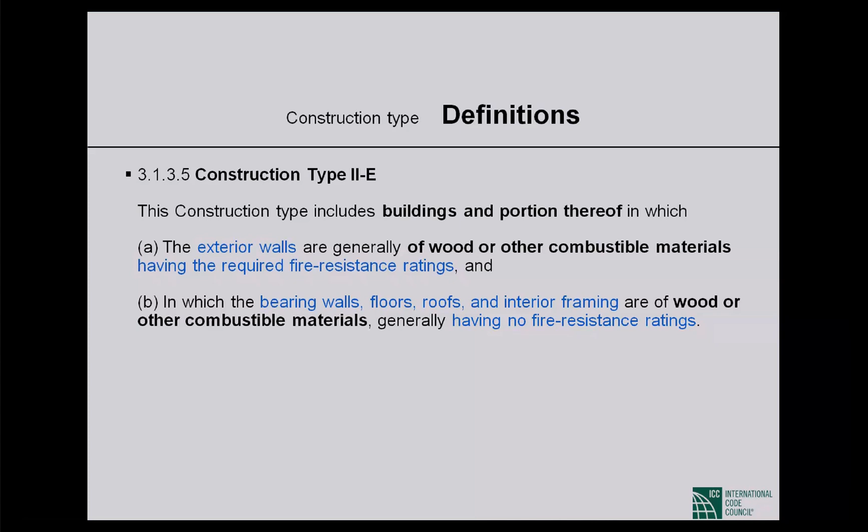This type includes buildings and portions thereof in which the exterior walls are generally of wood or other combustible materials having the required fire resistance ratings, and in which bearing walls, floors, roofs, and interior framings are of wood or other combustible materials, generally having no fire resistance ratings. So this is the last construction type, 2E.

Now about construction separation, this also includes occupancy, not only construction. When two or more occupancies are accommodated in a building, each such occupancy shall be separated according to the provisions specified in section 2.3, chapter 2, part 3, table 3.2.1. We have already gone through that chart or table, separated by hours.

The second paragraph says that when two or more types of construction are used within a building, the entire building shall be subject to the most restrictive construction type and shall comply with fire restrictions as per the provisions of this code. However, if the occupancies within the different types of construction are completely separated by construction that meets the fire resistance rating requirement of fire separation listed in table 3.2.1 of part 3 chapter 1, then each occupancy so separated may, for the purpose of this code, be considered as a separated building section.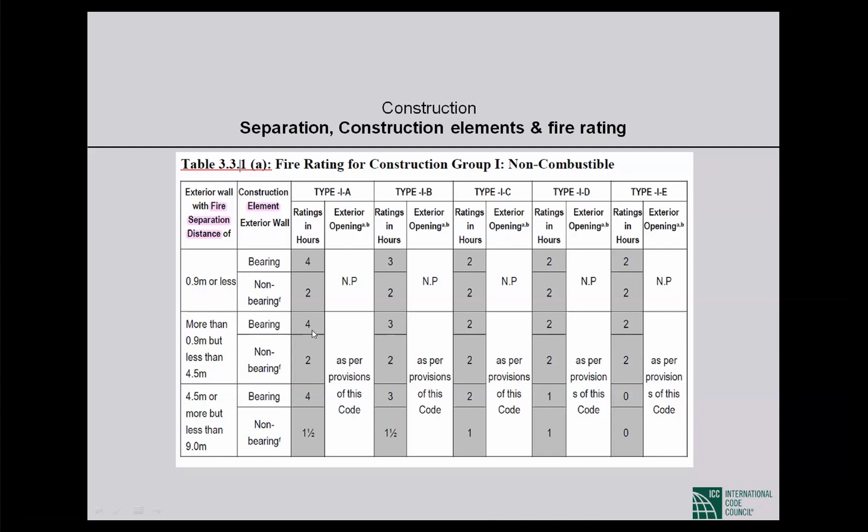So this table 3.3.1a, we are not going into the detail of each of the components. For any given situation, we can at least see certain aspects like if we have better setback or separation distance, we can have an effect on fire rating or fire separation rating, and also on the exterior openings decision. So for lesser separation, we have higher fire rating and no permission for exterior opening, but for better setback and separations, we have opening criteria suited to this course as per provision of this code, and relatively relaxed fire rating.

So this is the first table describing in detail each component of construction, the walls and the roofs and the floors and shafts and party walls or fire exits and their fire rating and their opening where necessary.

And there are three situations which determine which part will be made with non-combustible material, which are not permitted, and which have no limit. So the shade has a meaning here in this table. This part will be non-combustible. The white part may be combustible, made with combustible materials in certain situations.

So this is the first chart. The second chart, table 3.3.1b, is about fire rating of construction group 2. It is combustible materials. The same structure is followed here. The left one is about the fire separation distance, and then the construction element of the exterior wall, and later there are floors and roofs, specification for floors and roofs, and there are other segments of the structure like access corridor, fire separation wall and party wall, shafts, and recommendations for those things.

So one important thing about these two charts, or two tables, is that there is a very long footnote for each of the charts, at the end of the charts. The footnote contains detailed variations and exceptions for individual groups.

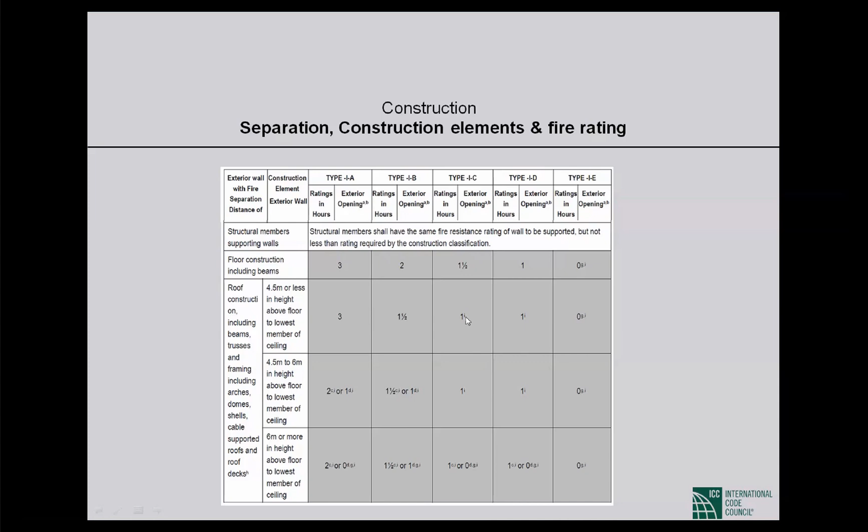If we go through the charts, we can see that in a situation, say for this particular area, there is a symbol I above 1, which is clarified in these footnotes. It says that materials which are not non-combustible as defined in this code may be used in non-bearing construction elements as per provision of the code.

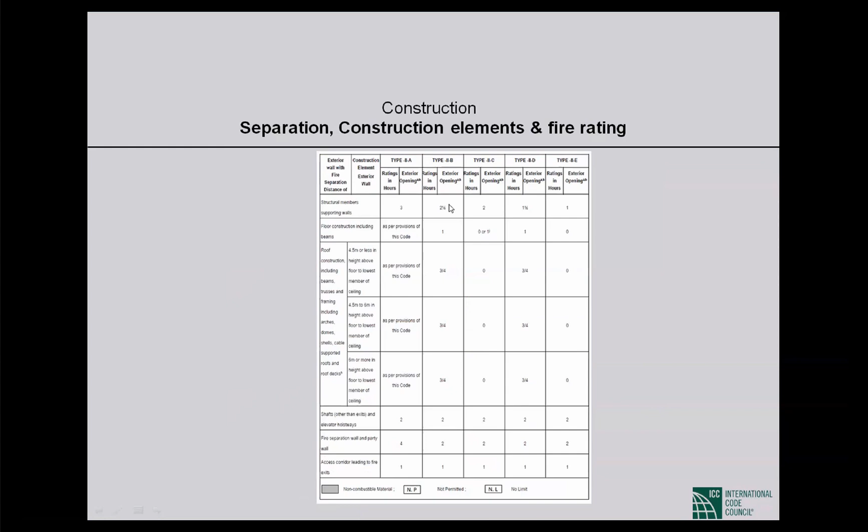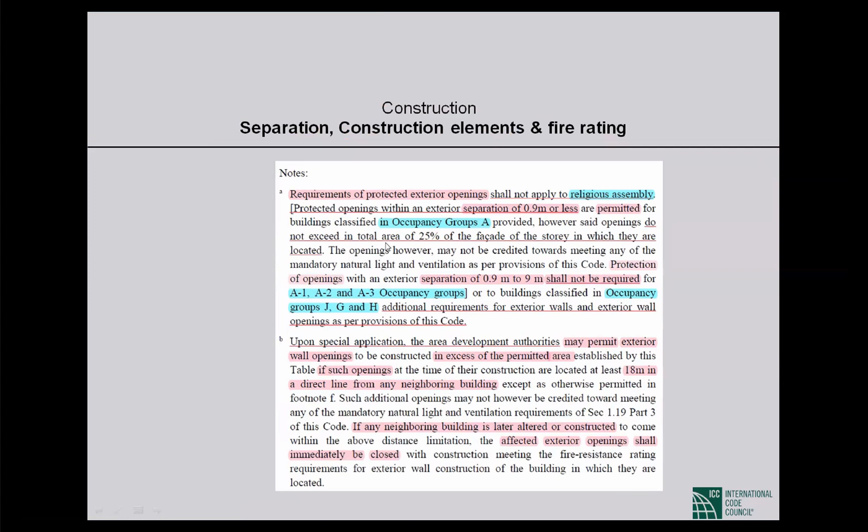So each superscript here has an explanation underneath, so that we can go through these explanations and get an idea of the detailed requirement for each occupancy group.

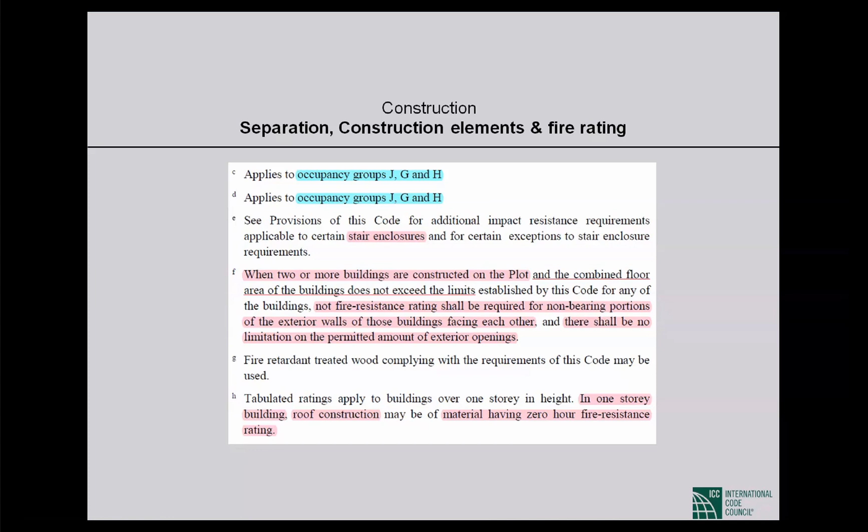So that's the end of this segment. Thank you. And I think it's time for the question answer session.